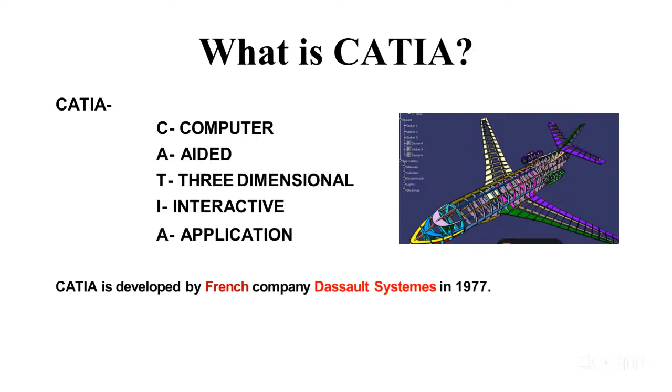Now CATIA is a powerful as well as popular software, which is presently leading the mechanical design market. As I said, this software is developed mainly for the Mirage aircraft in the initial stage. Now the majority of aircraft companies, around 90% of the aerospace domain companies, prefer CATIA, and around 60 to 70% of companies use CATIA in the locomotive domain as well as automotive domain.

This CATIA not only suits 3D modeling, it also suits computer aided engineering, like analysis, and computer aided manufacturing. So in all three sectors we are using CATIA, not only for 3D modeling. So now...

This application of CATIA, as I said, is used in aerospace, automotive, locomotive domain, as well as heavy machinery, shipbuilding, and consumables. So these are different domains where we are using this CATIA.

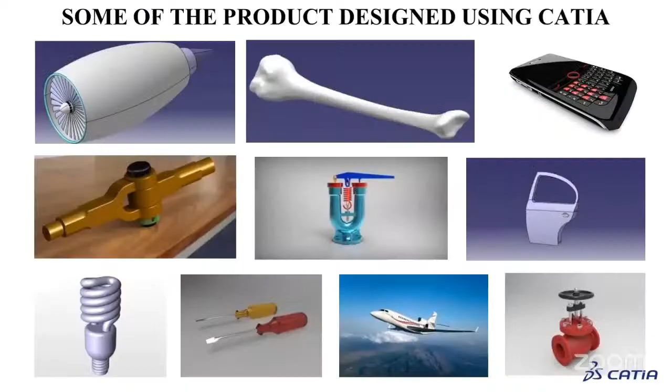Instead of showing these things in a PPT, I will run through the software so you will have a better idea first, and after that we will come back here.

See, one small portion of the aerospace domain aircraft I have opened here. This is the aircraft nose part, and one more I have loaded here. This is the aircraft wing portion, not the entire wing, but some portion of the structural parts of the wing I have loaded.

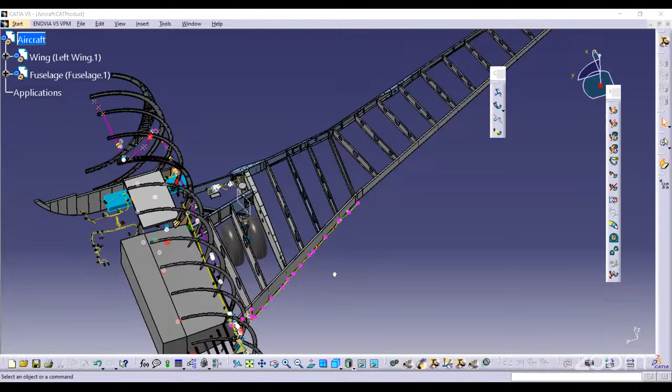It's not visible, sir, not visible, just a minute. Can you confirm once? Yes sir, okay, it's on. Okay sir, it is visible, right? Yes Pradeep, okay.

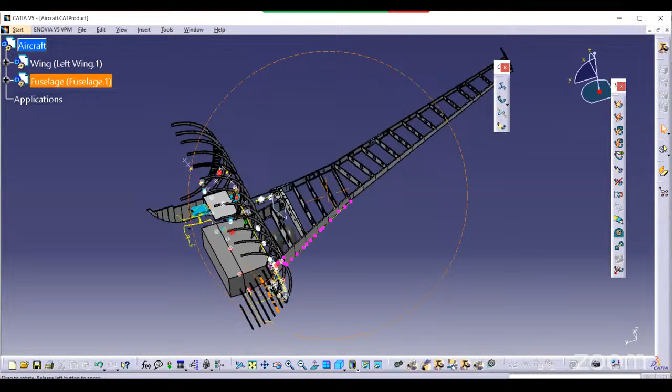See, this is one portion of the aircraft. Nose cone I have loaded here, and one more I am showing here in the aircraft domain - the wing section. So if you see, here not only the mechanical structures are there.

I think many of you are from a mechanical background. During the academic years you might have learned different applications like different softwares. There are similarities between each software, and some major plus points in some softwares. All the softwares are capable of doing mechanical design as well as aerospace domain, automotive domain - we can use it in all domains. But it depends on the flexibility of the software, how much flexible it is to do our design. Based on that, the company will select the software.

Now if you select a CATIA software, consider you are working in a company that is using CATIA software. How they are going to select the software is: first they will check the flexibility, after that license cost they will check, after that how they can use the software and its different applications in their project.

If you consider an aerospace design or a bike, whenever you start designing a bike, not only mechanical parts will be there - you might have seen different types of wires, petrol pipes, fuel pipes, as well as cooling systems. So these are different systems that will be there. The CATIA software should adopt all these systems - CATIA is not only for 3D modeling.

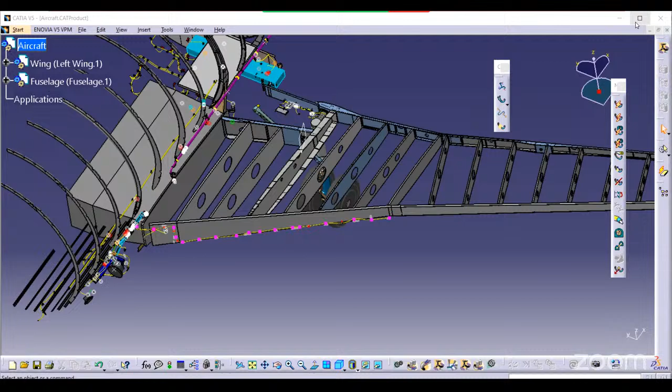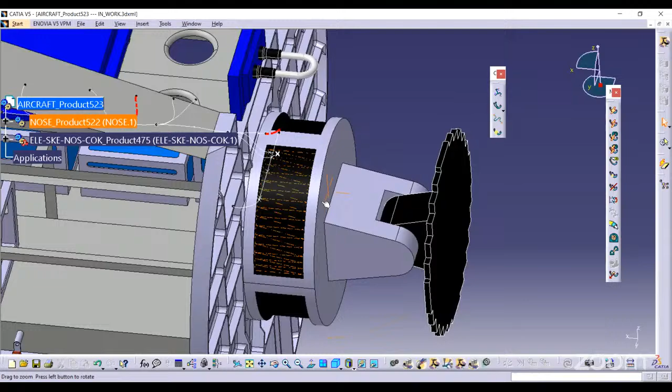Now, whenever you are starting any one product, as I said, there are different domains. If you see here in the aircraft nose cone, I will open it. These are the surfaces - for surface design we use one profile. These are the electronic systems - for electronic systems we use a different application within CATIA. And these are the wirings - for wiring design also we use different applications in CATIA.

If you go here to start, these are the different applications. One is infrastructure, which is related to CATIA V4 as well as catalog creation. If you come to mechanical design, there's part design, assembly, sketcher, product functional tolerancing and annotation, drafting, composite design, core cavity design - these are the different applications within mechanical design.

If you come to shape design, there are different types of shape generation methods using formulas and so on. Next, analysis - like how Hypermesh and Ansys work, you can do the same thing using CATIA. After that, plant layout design.

Any plant layout design you want to make, you can use CATIA. As well as machining - lathe machining process, prismatic machining, surface machining, advanced machining, NC programming - these are the things.

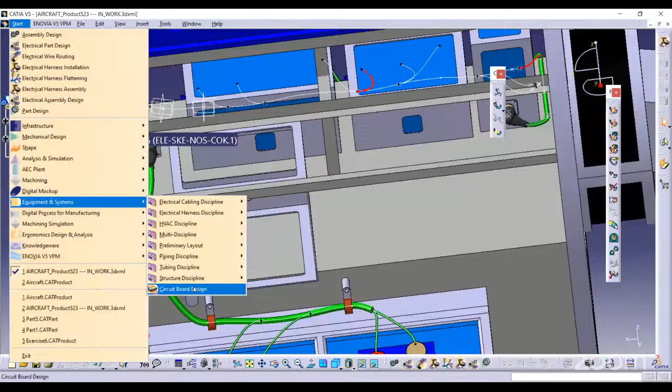After that, electrical wiring design, HVAC design, piping design, tubing design, circuit board design - these are the different applications available. So as a design engineer, you can't learn all the applications. You will specialize in one or two applications.

Whenever you are learning CATIA, you will first learn the basic level, which means mechanical design. After that we go to the advanced level, which includes different applications as I said - piping design, tubing design, electrical wiring design, circuit board design, as well as composite design, molding design. These are the advanced workbenches. To learn the advanced workbenches, you must first be aware of the basic level. These are the different applications available in CATIA.

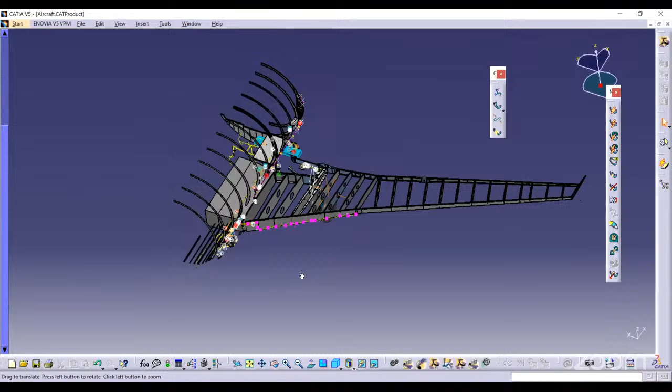Now in CATIA, one more application is there, using formulas. Earlier in mechanical design, you might have worked like creating one block and given values for that. If you want to modify or create a different product again, what we would normally do is create a new file and design a new thing. But in CATIA we don't need to do that - by using formulas we can also create parts, and VBA scripting also we can use. These are the things available.

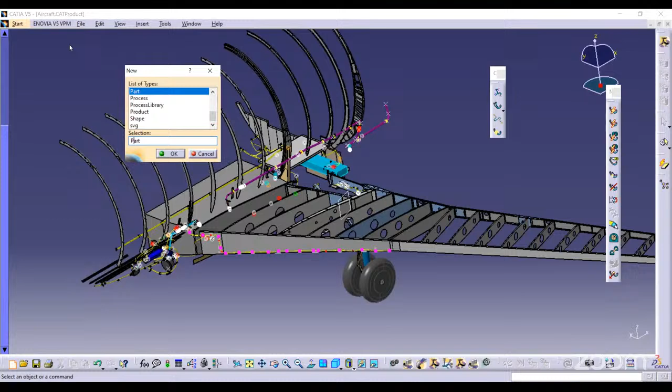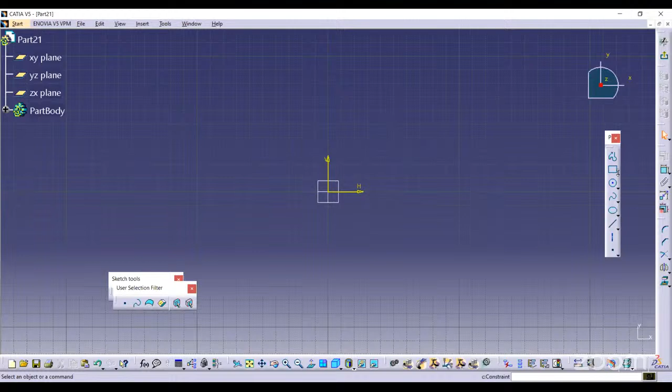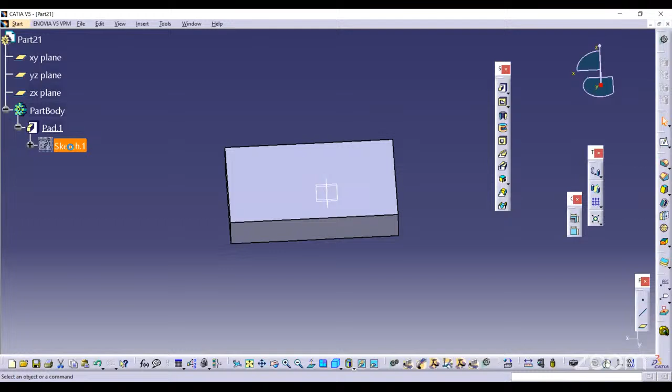A simple thing I will show here - one simple product creation using a simple dimension. See, this is one simple rectangular block I have created. Now if you want to modify or create one more block, what you would normally do is create a new file. But in CATIA it is not required like that - you can work with formulas. So this is just an overview I am giving.

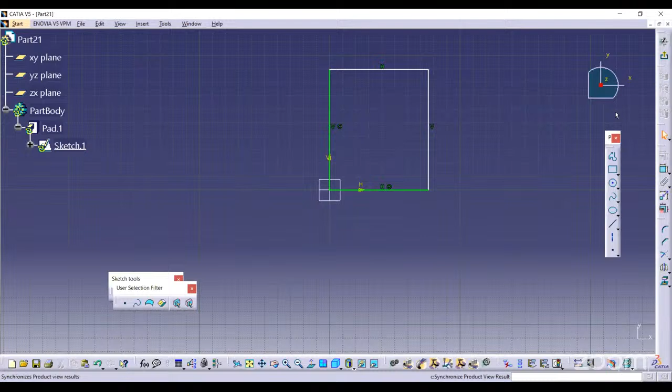Say the width is 50 and height must be 25. Now, whenever you are giving a dimension, suppose as my height increases, width should increase, or vice versa, if my width increases, height should increase. You can take this as a case study. So now 25 is my height, and for this I need to add a formula.

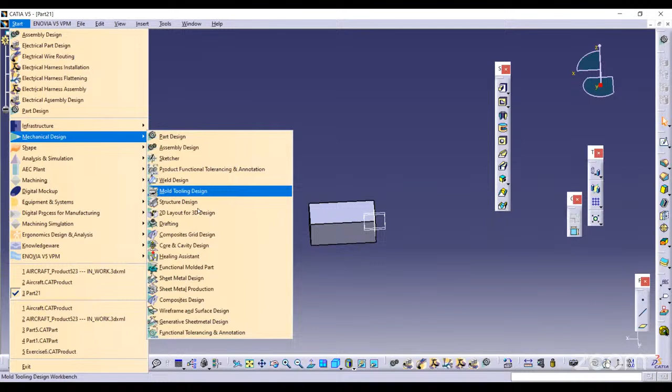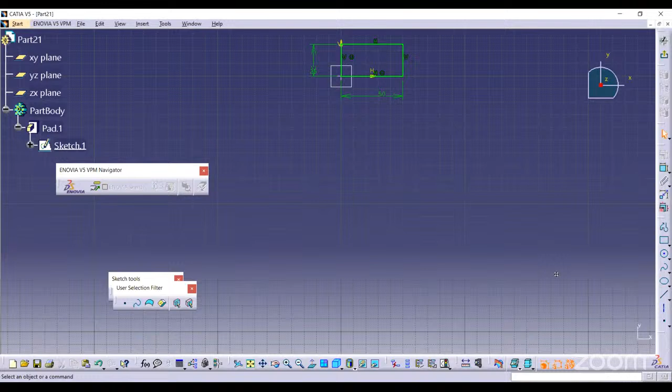I will show you later because I'm not getting that license here, that application. So in the later stage I will show you that. Let me check whether I have it or not. So in the later stage I will show you, because I am not getting the application now.

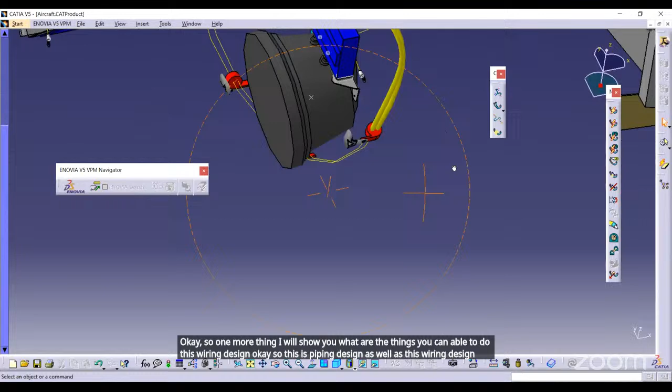One more thing I will show you is wiring design. This is piping design as well as wiring design. Wiring design is not only for electrical engineers, mechanical engineers also work on wiring design, meaning electrical wire harness design. Presently in the market there are a lot of opportunities in wiring design, and also in mechanical design.

In mechanical design, there are different domains, like aerospace domain, as well as automotive, locomotive. These are the different domains. But in companies, they will look for expertise in one particular subject. So if you know CATIA, they will not simply hire you - they will hire you for one specific task.

For example, if you are going to any car manufacturing company, say you are going to Mercedes Benz - there will be an engine, structures, piping, electrical wiring, chassis design, electronic systems, electrical systems. The company will select you based on you being expert in one particular area.

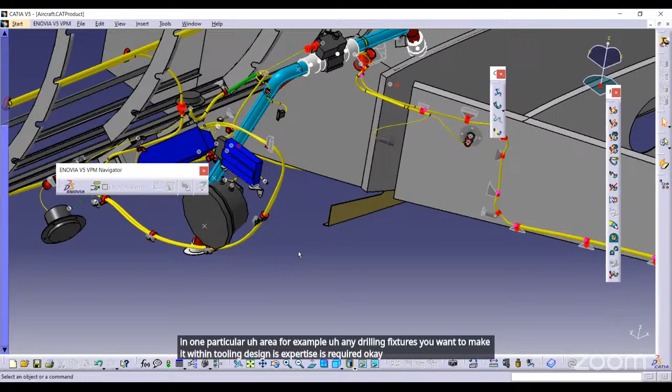For example, for drilling fixtures, tooling design expertise is required. For that, the basic level will be the same as I said at the start - sketcher, part design, assembly, drafting. As I mentioned, this PPT is visible to you.

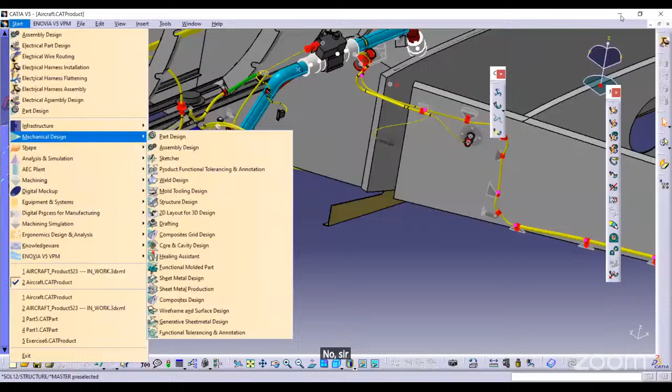Hello, hello. No, sir. No, no, yes sir. No, right, just a minute. Okay, yeah, now yes sir, yes sir, now it is visible, right?

For example, you are working for a BMW company - there are different variants, and the company will not select a different software for each variant. Whenever they select one software, they will do research regarding how much that software will help them in the product.

Many people who are learning or just passed out engineers think that designing a 3D model is the actual design - no, it is not like that. There are different applications apart from CATIA that come into play, for example requirement capturing - meaning a design vendor or customer comes and asks for some requirements.

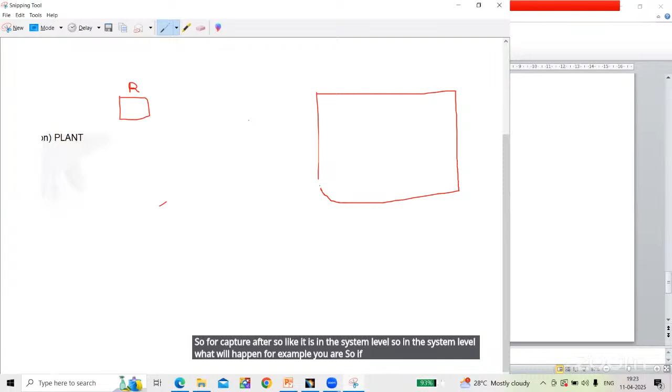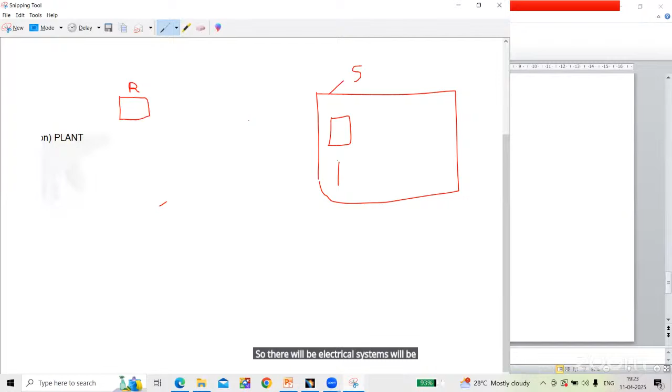So for capturing, it is at the system level. So in the system level, for example if it is one car, one is mechanical structure will come, correct? After that, electrical systems will be there, then electronic systems, then cooling systems, then HVAC system. So like that, fuel system will be there. So these are the different systems will be there.

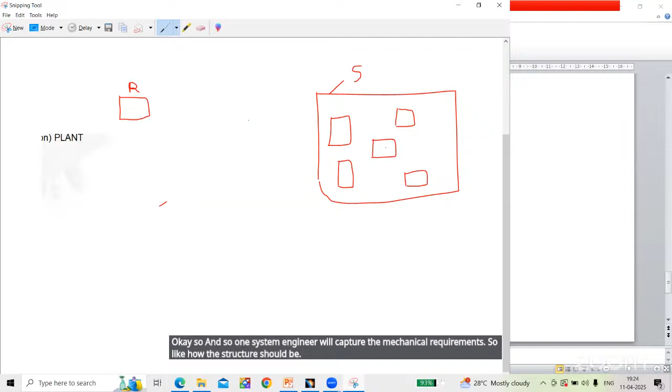So each system will be handled by each stakeholder. So one system engineer will capture the mechanical requirements - how the structure should be. So I can say that A to Z requirement. But there should be one standard that should be there.

The customer will come and say I want this shape and all. So whatever he asks, we can't give exactly that shape, because there are some standards we need to follow. So that standard we need to adopt first. Car means how the aerodynamic shape should be there - what is his speed, what is the maximum speed he requires for that. These are the requirements that will be there from the customer.

He should not say that my car shape should be like this. No, his requirement must be how it will perform - it should run 200 km per hour or 500 km per hour. So like that he has to give the requirement.

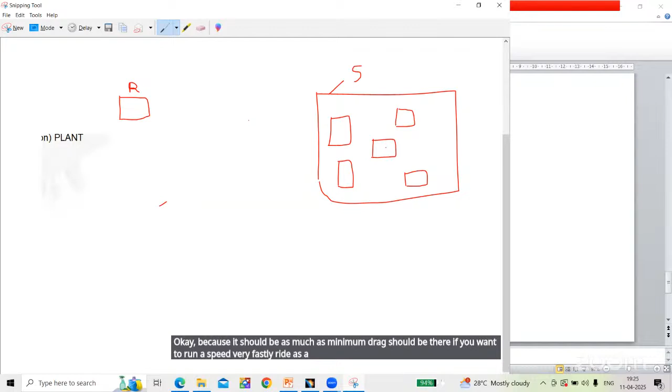So based on the requirement, the system engineer will decide which type of shape is required - aerodynamic shape is required for that, because there should be as much minimum drag as possible if you want to run very fast, like a bike or a car. So you require a smooth surface finish, meaning the aerodynamic shape should be smooth. So which type of aerodynamic shape he should adopt - those things he will decide.

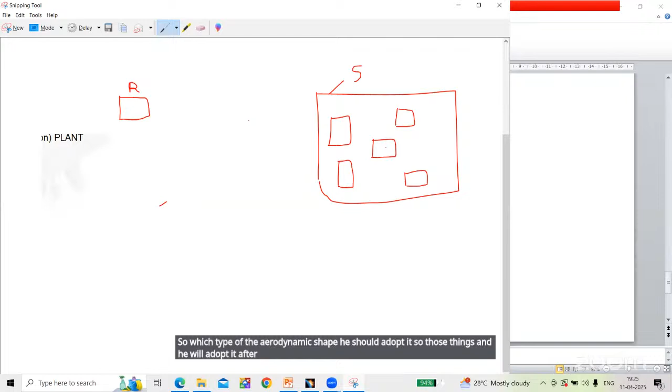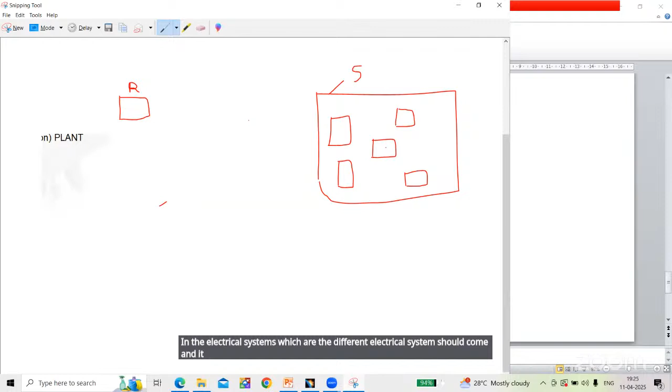After that, which type of cooling system is required, where the cooling system should be, what is the input and what is the output for that. In the electrical systems, which different electrical systems should come, and it will depend on the electronic system - which are the major electronic systems they are using, and which are the new technologies in the market. So based on that, the requirement should be there.

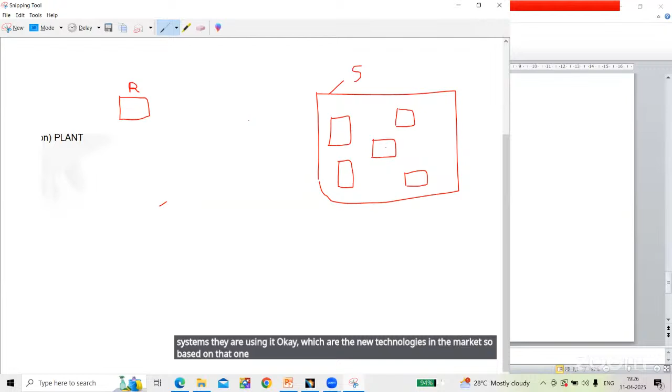So these are the things they will research. After that they will adopt a system. So based on that requirement capturing, they will start deriving the system level. So once the system level is derived, next what will happen is the logical design.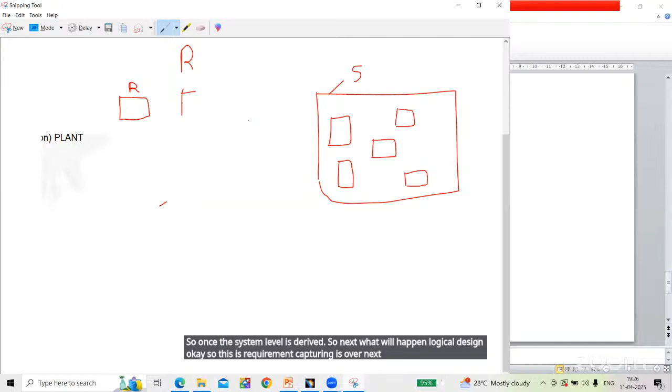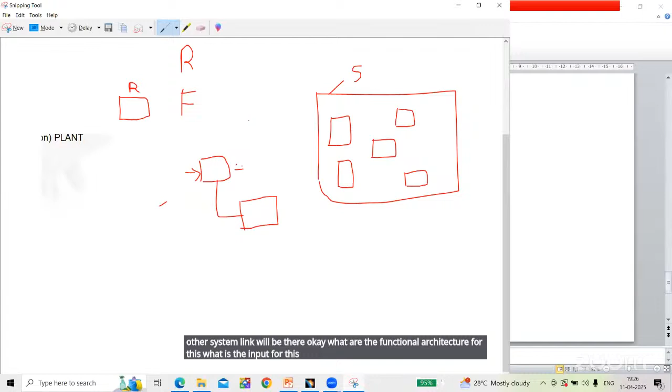So this requirement capturing is over. Next, they will make the functional architecture - they will select the systems first, after that how one system links to another system. What is the functional architecture for this, what is the input for this, what is the output for this one. So after this requirement and functional architecture, then they will derive a logical design.

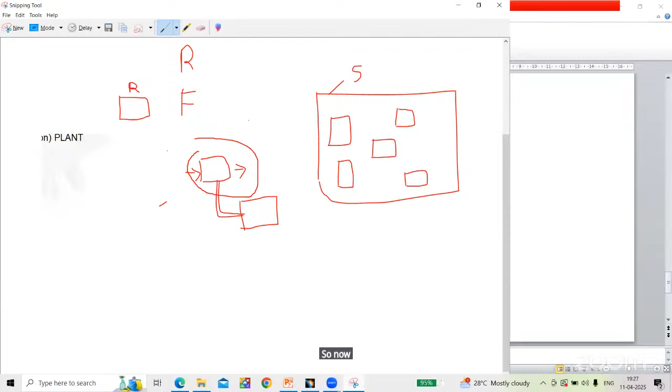Logical design means - for example from one system to this system, what are the inputs and outputs required now. So now you have derived within a system level. After that, one system to another system, how the interlink will be there - so these systems will be there.

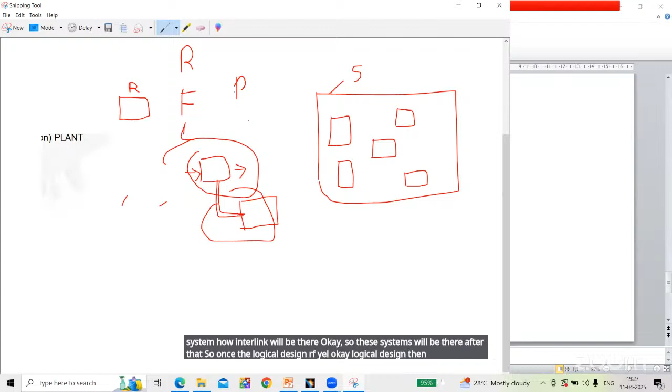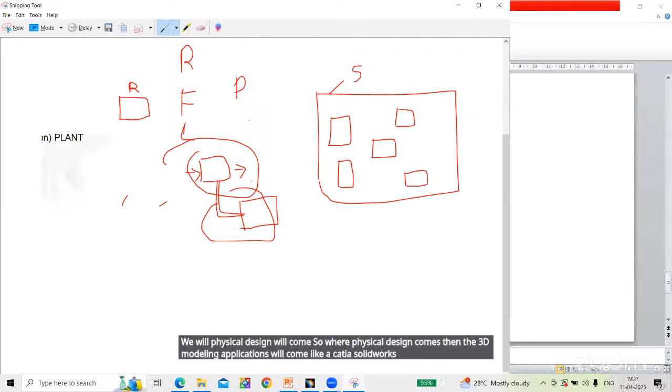After the logical design, the physical design comes. For physical design, 3D modeling applications come into play, like CATIA, SolidWorks, Solid Edge, Creo, NX CAD. These are the different applications we will use.

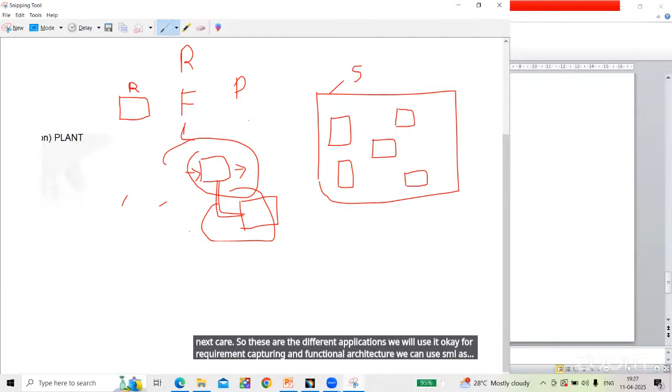For requirement capturing and functional architecture, we can use SysML as well as Mathcad, and also Dymola. These are the different applications we can use.

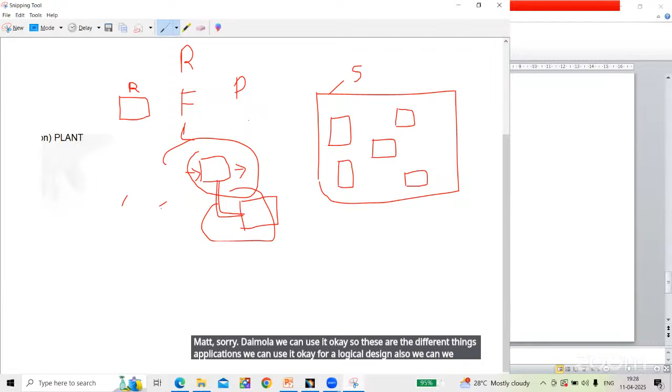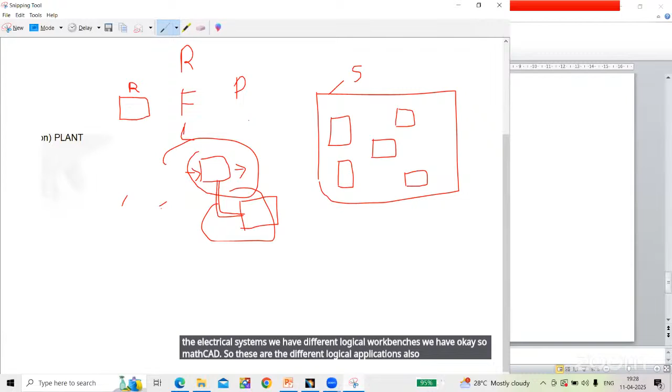For logical design, also for electrical systems, we have different logical workbenches. Mathcad and these are the different logical applications you can use, even Dymola also.

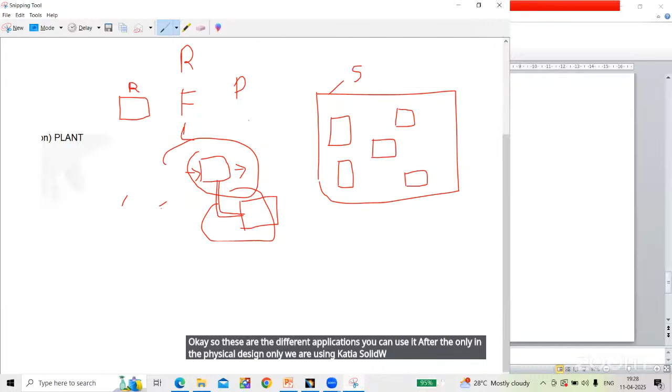After that, only in physical design are we using CATIA, SolidWorks, Solid Edge, which are software applicable for 3D modeling, and analysis software like Hypermesh, ANSYS, Abaqus. These are the different analysis software we will use. Got it?

Any questions? Any free designing software or student license software other than Fusion 360? And I wanted to gain depth knowledge in my career—where can I find a resource to learn more?

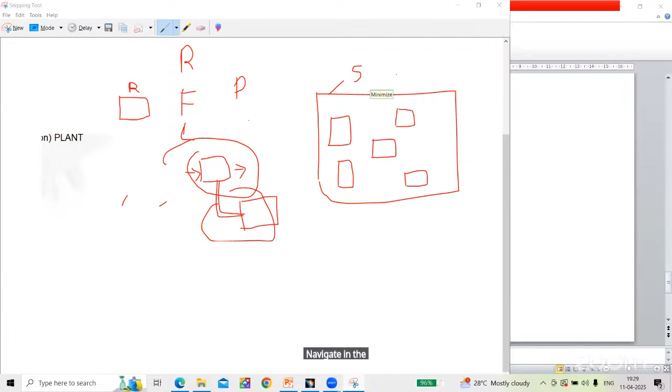Freelancing software for design. Okay, navigating in design—how to easily navigate in design software.

Today's session is about CATIA, so I will just give some information about CATIA only.

For licensing, if you want to purchase a licensed software, there is a cost of $100 for the student version, for CATIA.

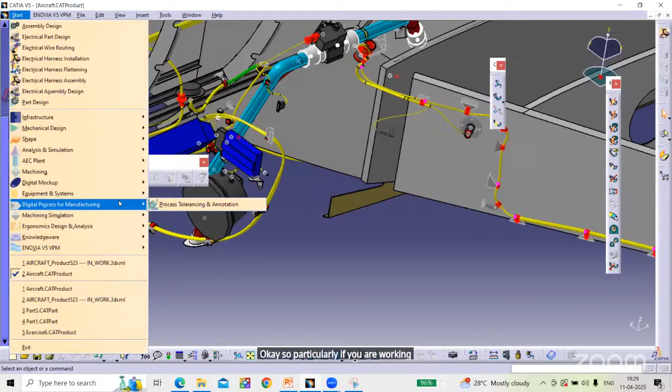There will also be limited packages—like here, there are different software we have, right? So all of those things will not be there. Particularly if you are working on mechanical design, whichever things are required for you, you have to pay and take it.

For the student edition also, only whichever is related to the student version, that only. If you purchase a student version and use it for commercial purposes, that is wrong. Whenever you design any model and send it to someone, you created it in a student version and gave it to a company.

Then automatically the CATIA Dassault Systèmes will come to know that a student edition was used for commercial purposes. When you load the application or load the part, automatically a pop-up will come saying you created this part in a student version. But in our institute, we have the licensed applications.

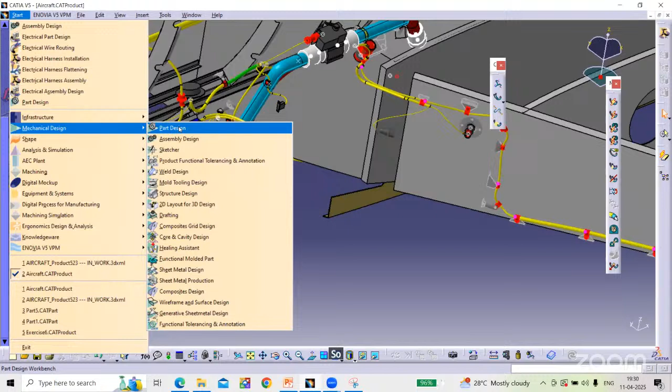The license will have some time duration. Whenever you are learning the course from our institute or organization, it will be included in the package—the software will be given, and you can learn it. We will help you navigate those things.

Each software, like CATIA as well as Creo, if you compare the two, the user interface will be different. In CATIA we use the mouse for zoom in and zoom out by a different method, but in Creo the mouse operations are different, and the options we use will be called differently.

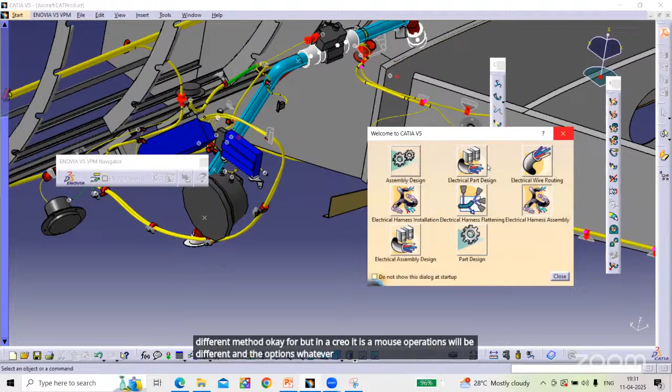For example, if you go to part design, the naming of each option will be different—different names for each, different between the software.

As an engineer, as I said earlier, you can't learn all the applications because there are around 50 to 60 applications within CATIA alone. You can't learn all of them, but you can become expert in 2 to 3 domains—for example, chassis design, or tooling design, or mechanical design.

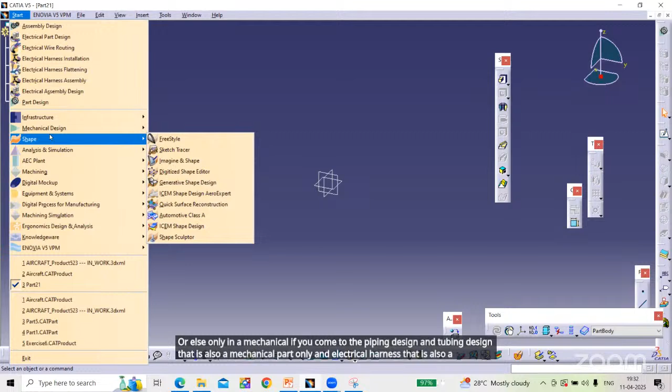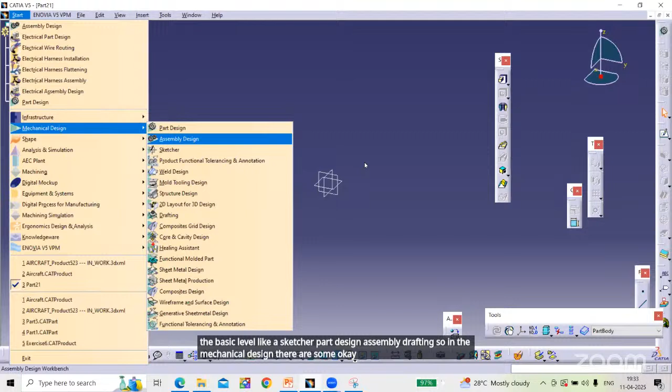If you come to piping design and tubing design, that is also a mechanical part, and electrical harness, that is also something mechanical engineers can do. These are the different domains you can navigate. But to navigate these advanced applications, you must have the basic level skills like sketcher, part design, assembly, drafting—these are the applications in mechanical design you can use.

Any other questions?

Shivani added what are the courses we will conduct in our organization, what is the duration, what is the time mode, and all the links she has shared.

What is the cost? Shivani will tell you in the later stage about the cost of the course.

Is there any analysis module in CATIA, any example modules? Devesh, I am expertise in piping design, tubing design, electrical harness design, as well as mechanical design and structural design, but the analysis part I am not handling. One of my colleagues will handle that, so he will explain you about that one.

How to adopt CATIA in analysis applications. Which software should a beginner start with?

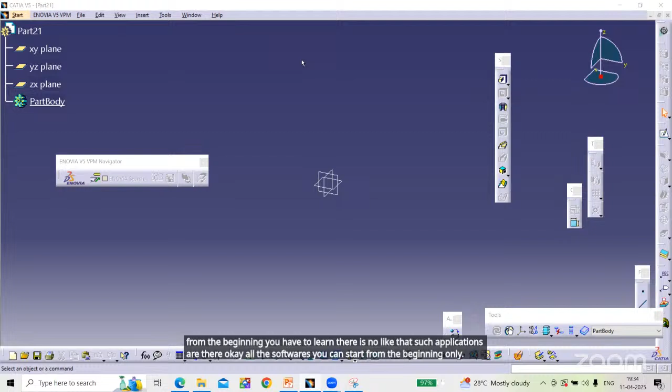There is no particular software that you have to learn from the beginning. There's no such restriction. All the software you can start from the beginning. If you want to learn, you can learn CATIA first, or if you want SolidWorks first, you can learn SolidWorks. But the major thing will be here.

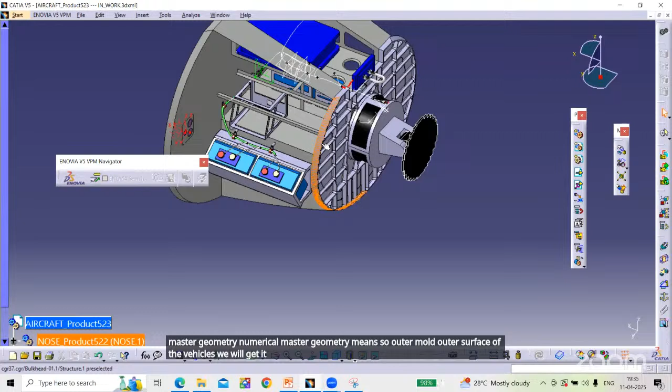We will use surface design also, part design, sketcher application we will use, and each time we have to use the numerical master geometry. Numerical master geometry means the outer mold, outer surface of the vehicle we will get, and from that one we need to cut and modify those surfaces as per our requirement. After that only we can use it.

These are the things you have to learn from any one software, after that you can shift to any other software. We will teach you here how to read a drawing, like 3D to 2D, how we are going to convert it by hand, and after that 2D to 3D, how to convert it. That also we will teach you first.

Directly by seeing a 3D model, even if you know CATIA applications, if you are going to start any one model, it is not possible. There are some systematic methods, and whenever you are designing any one part, it should be design-free, meaning user-friendly.

For example, I have created a part, then I left the organization. What will happen? Another guy will come and check from where you have taken a dimension, how the dimension has been taken, how to modify it. These are the things that will be there.

Whenever you design a 3D model, if you modify any one location, that modification should adopt in all the locations. We have to modify it in that way, not like how we are doing it in engineering time. There are different methods that we will adopt.

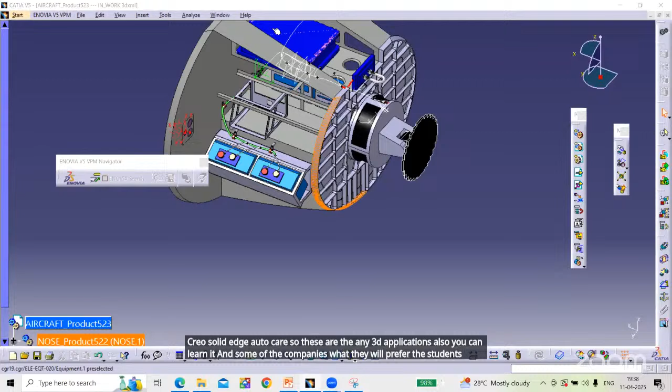For learning, you can learn with CATIA, SolidWorks, Creo, Solid Edge, AutoCAD - any of these 3D applications you can learn. Some companies prefer students who know 2 to 3 applications, because in India we have different types of companies.

I will show you here. One is OEM companies, and the second one is service companies.

So does anyone know what is the difference between OEM companies and service companies? If you know, just ping me in the chat, no problem.

Hello. Anyone can tell me what is OEM and service companies? Yeah, product based and service based. So what does it mean? Anyone know? Okay, I will tell you.

OEM means original equipment manufacturer, or a product based company. Service means who will give service to those OEM companies. For example, Boeing, Airbus, BMW, Maruti Suzuki - these are the OEM companies. Service companies means like Cyient, Tech Mahindra, as well as Infosys.

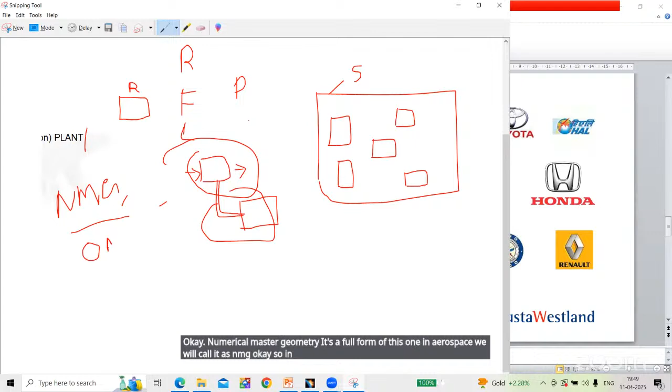NMG, numerical master geometry - that's the full form. In aerospace, we call it NMG. In automotive, we call it OML, outer mold line. It means they will give some of the standard surfaces, by using the formula creation and all.

We can't say that in this stage only we are going to use surface design. Whenever you are at the learning level, it will be the fifth workbench you are going to learn - first sketcher, then part design, assembly, drafting, after that surface design, sheet metal design, like that in the basic level. But at the working level, whenever you join one organization, in all the domains it is not necessary to use surface design.

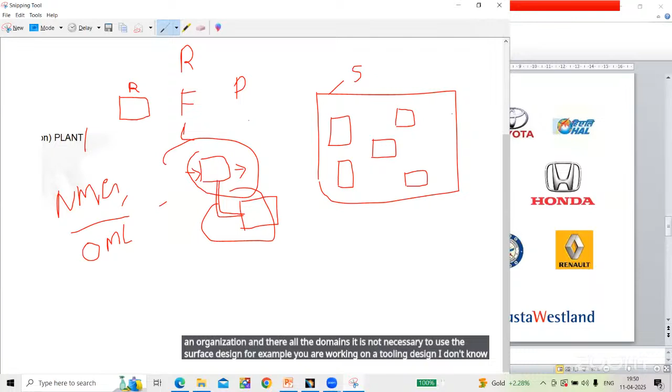For example, if you are working on a tooling design or creating heavy machineries, surface design is not required. When there is an aerodynamic shape - like a car door design, or car body design, or aircraft wing design - this time we require surface design.

Then we work in parallel - we will not only work on sketcher and part design, we work on all together. Like we have to modify some of the surfaces as per our requirement, then we need to create a 3D part using part design. Again in that part design you have to remove something, again you have to go for surface design and modify the surface based on your requirement, and after that again come back to part design, like that.

So it means you will work simultaneously in different applications - you will not stick to one particular application or workbench. Ramesh, did you get your answer? Okay, so is any other question there? Tell me.

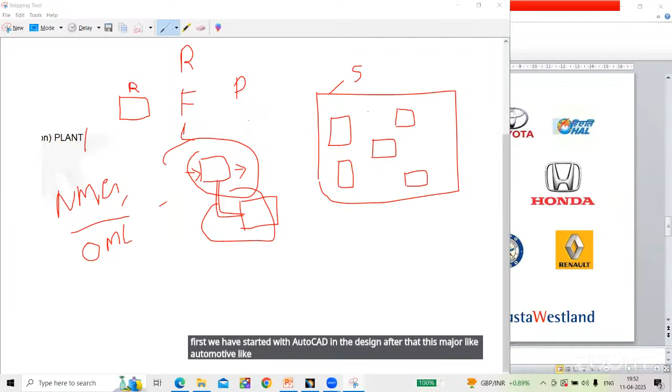AutoCAD we mainly use in small scale industries. Majority of small scale industries are using it for mechanical applications, civil engineering applications, as well as electrical engineering applications.

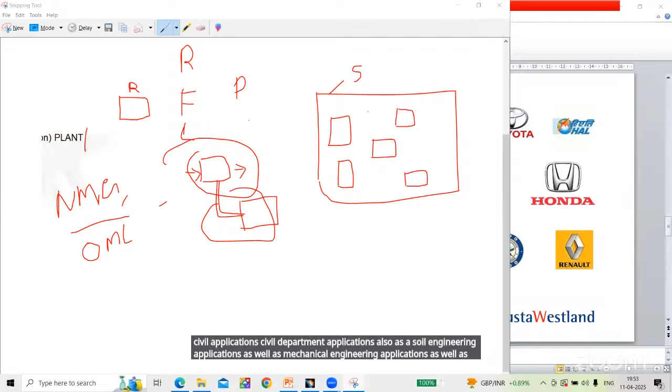Mainly Autodesk applications we use in 2D applications like sheet metal design, and nowadays we have Fusion 360. But the usage of companies is not that much. If you consider CATIA percentage-wise in the aerospace domain, it is around 90 to 95%. Autodesk will be only 2 to 5%, like that.

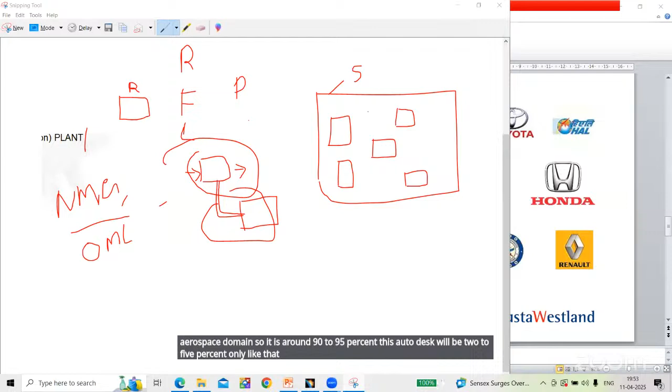Surface design and all, created using Autodesk applications, is very difficult. But CATIA is very flexible - the user interface also, whatever applications you are using, is very flexible to the engineers. That's the reason, from the beginning, CATIA is standing in first place.

Next, any questions? Does AI affect the design industry? Not much, because in software applications maybe it may affect. But in design, in machinery designs, the standards we need to follow.

We have some basic standards. For example, if you are going to create a hole in a plate, you can't simply select a 2.1 mm diameter hole - it is not possible. There are some standards, and we only follow those standards. So AI will not much affect this.

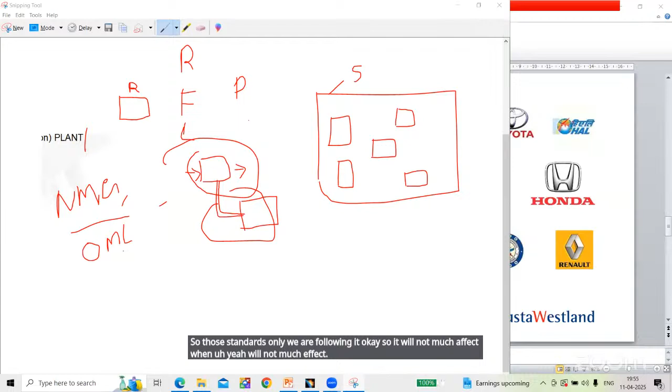After completion of the course, can you provide any placement, sir? Shivani will guide you about this one.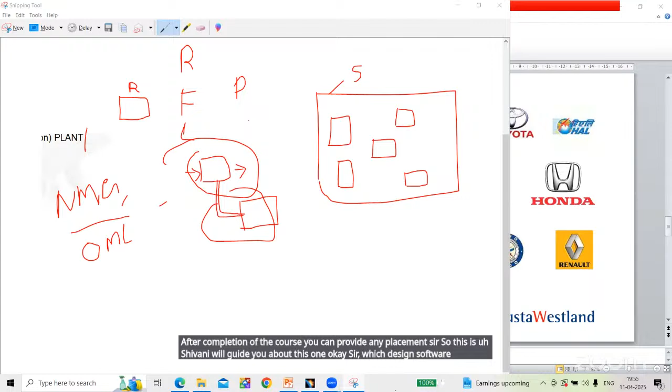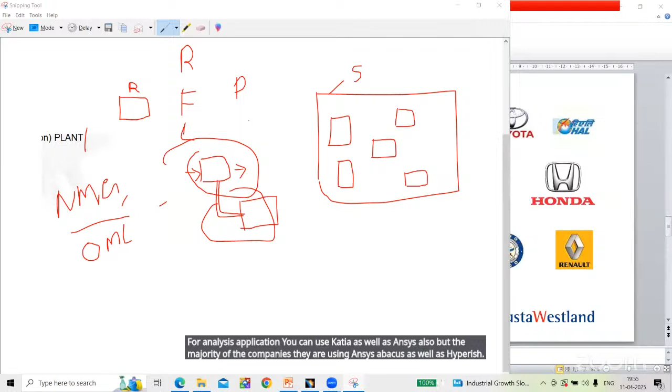Which design software is far better for simulation, CATIA or ANSYS? For analysis applications, you can use CATIA as well as ANSYS. But majority of companies use ANSYS, Abaqus, as well as Hypermesh for analysis purposes. CATIA they will use, but not up to the mark - percentage-wise it is very less for analysis. But in different applications like electrical wire harness design, they will use it.

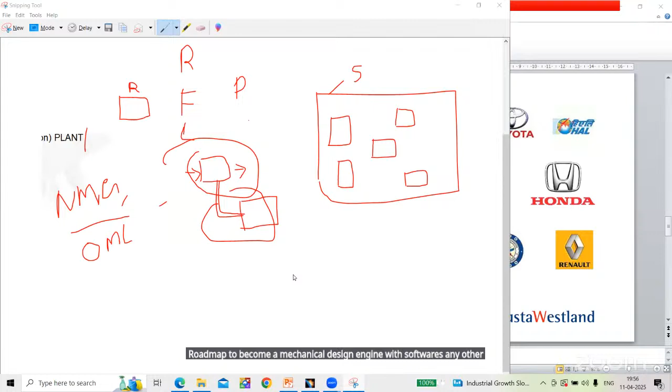Next, any questions? Roadmap to become a mechanical design engineer with software, any other skills to master? Here, you should first choose which domain you want to go into - I'm not talking about aerospace, locomotive. Whether you want to go to the system engineering level, or only the design level like execution level, or you want to go to the analysis level.

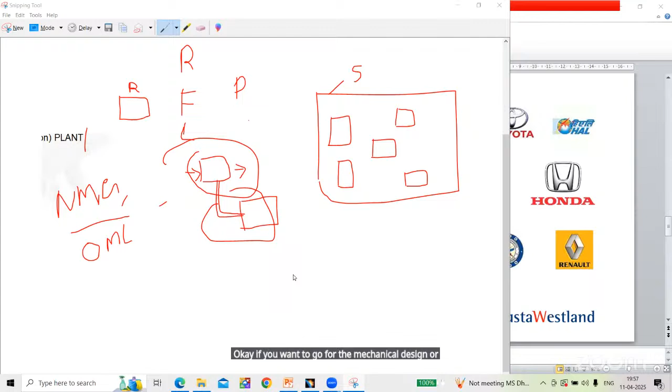These are the options that will be there, so based on that you need to choose where you have to go. If you want to go for analysis, you have to learn Abaqus, ANSYS, Hypermesh - these are the applications. If you want to go for the system level, then Dymola, MathCAD - these are the things. If you want to go for mechanical design or electrical design, you have to go with CATIA, SolidWorks, Solid Edge, Creo.

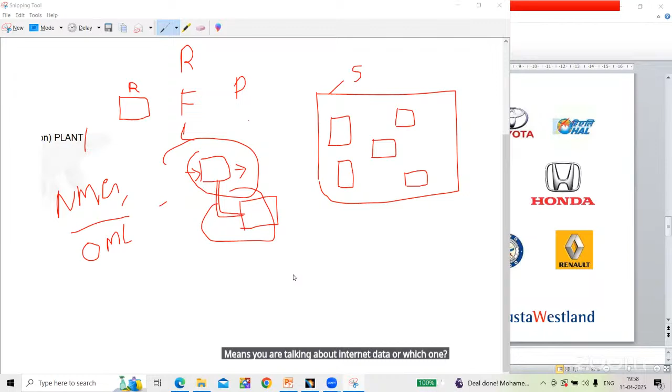What is the percentage of data loss while transferring a CATIA file to any ANSYS software? Can you specify what is the percentage of data loss - do you mean internet data or which one, Ramesh?

Whatever part we save in CAD, we will not give it directly to the analysis guy. He will ask for a specific format, like STL, which means stereolithography. There are different formats, and whichever format he asks for, we will give, so there is no data loss. We don't save any part locally; we use a particular database, so all parts are available there.

From the database they can easily pick the part and run it. But when running any model in analysis software, it takes a lot of time, because you need to give boundary conditions. Once you give the boundary conditions for that part and run it, it can take 1 hour or 2 hours depending on the complexity level of the product.

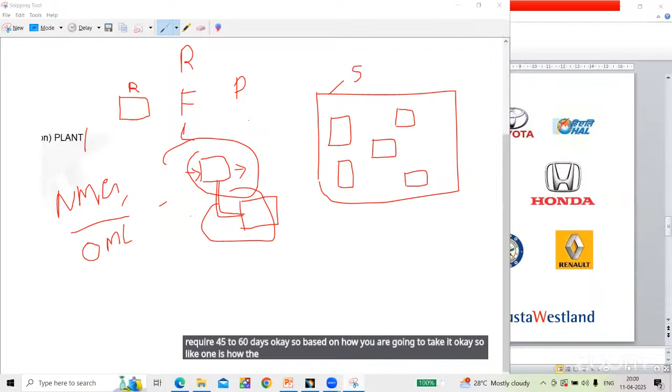Sir, how much time does it take to learn, for beginners to advanced, mechanical CAD design, for example SolidWorks, in terms of months? If you want to learn the basic level, like how to read the drawing, how to navigate the software, and how to adopt the software to your application and requirements, it may require 45 to 60 days, depending on how you take it. Your reading capacity should be there; we teach the basic level based on that.

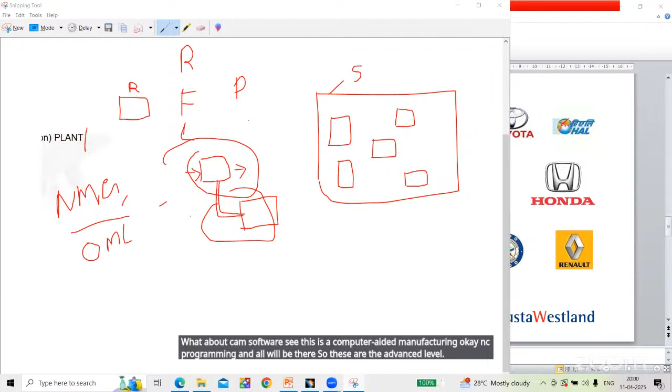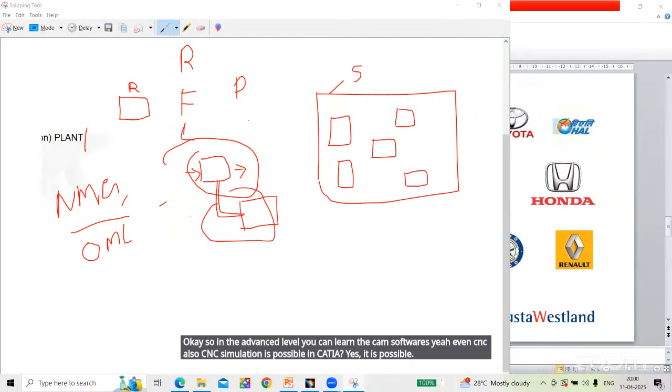What about CAM software? This is computer aided manufacturing. NC programming and all will be there, these are the advanced level topics you learn after the basics. Even CNC simulation is possible in CATIA, yes it is possible. That's why I said in the beginning it is not only for design, CAD, but also CAE and CAM. All three you can use it.